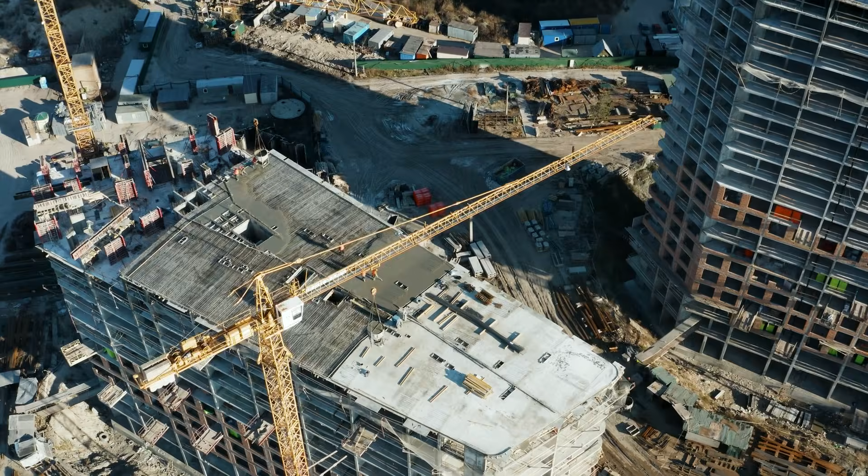Once a quiet riverside capital, Brisbane has surged into one of Australia's fastest-growing urban powerhouses, driven by rapid population growth, accelerating development, and a skyline rising higher every year.

But beneath this momentum lies a problem so severe that planners have quietly warned it could throttle the city's future. Every train line, every commuter route, every daily journey into the central business district has long depended on a single rail crossing built in the 1970s—one fragile choke point carrying an entire region.

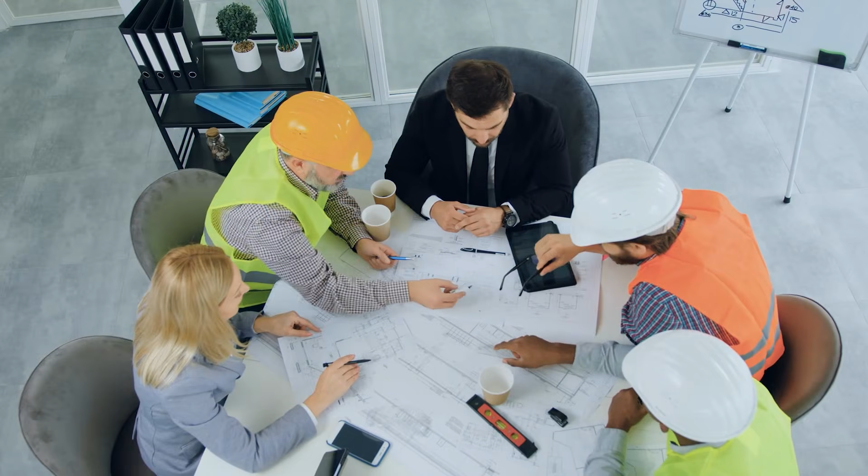For years, politicians debated it, engineers flagged it, commuters felt it, yet nothing changed. The trains got busier, the delays grew longer, and Brisbane inched closer to a breaking point. How long could a growing global city survive with a transport network that had already hit capacity?

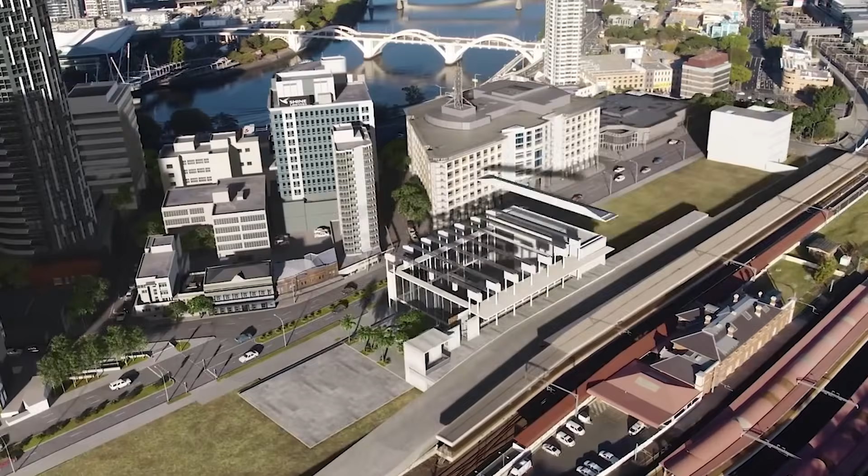Finally, the answer arrived, not with small fixes, but with the most ambitious transport project Queensland has ever attempted. Deep beneath the Brisbane River, a new rail line is being carved through the earth, complete with cavernous underground stations, cutting-edge signaling, and a massive tunnel that will redefine how the city moves. Today, let's delve into Brisbane's $13 billion cross-river rail megaproject.

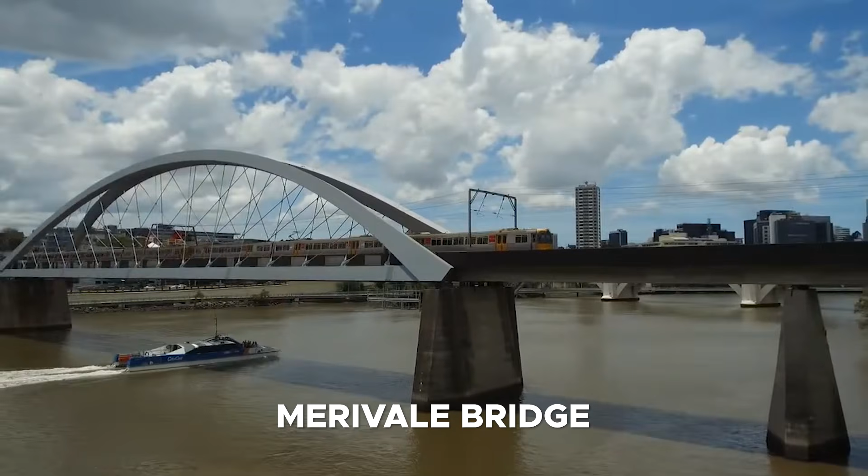Brisbane's geography has always shaped its transport problems. The Brisbane River divides the city in ways that force nearly all rail lines into a single narrow corridor as they approach the central business district. At its center sits the Merivale Bridge, the only inner-city rail crossing over the Brisbane River.

When it opened in 1978, it was hailed as visionary. No one imagined it would one day become one of the most overstretched pieces of rail infrastructure in the country. By the 2000s, booming population growth and rising train patronage pushed the network closer to breaking point.

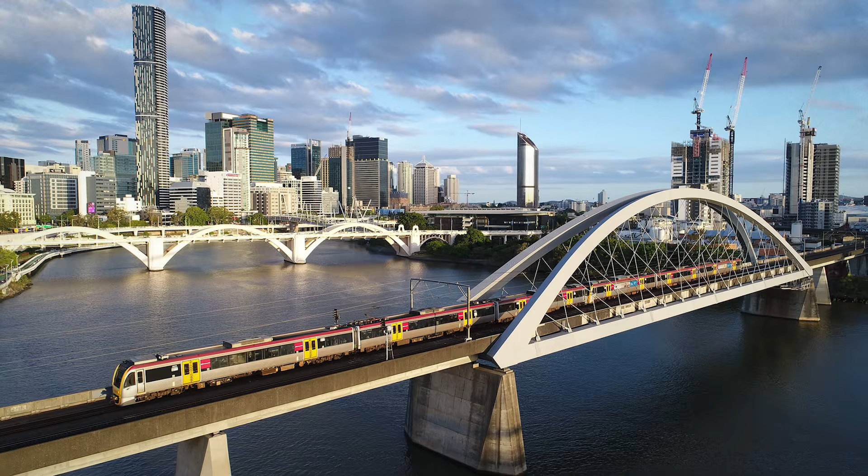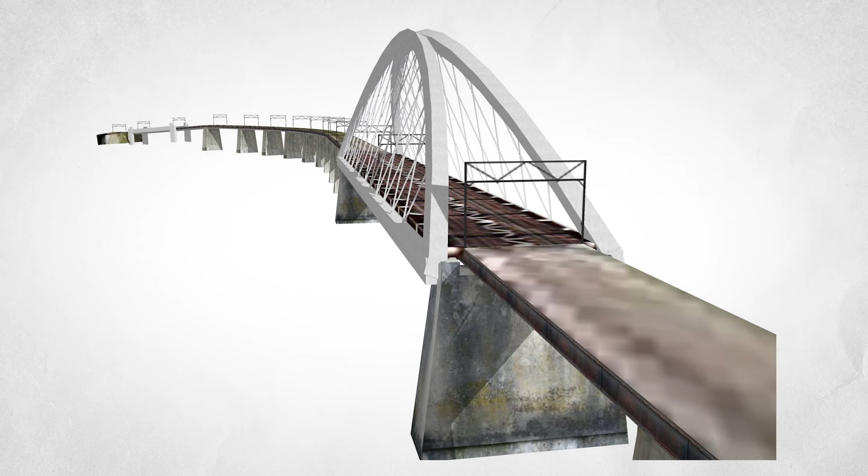Every additional service, no matter where it came from, had to squeeze across the same bridge. Peak hour trains ran at maximum capacity. Delays on one line rippled across the entire network, and modeling showed Brisbane would hit an unbreakable ceiling by the mid-2020s, unless a second river crossing was built.

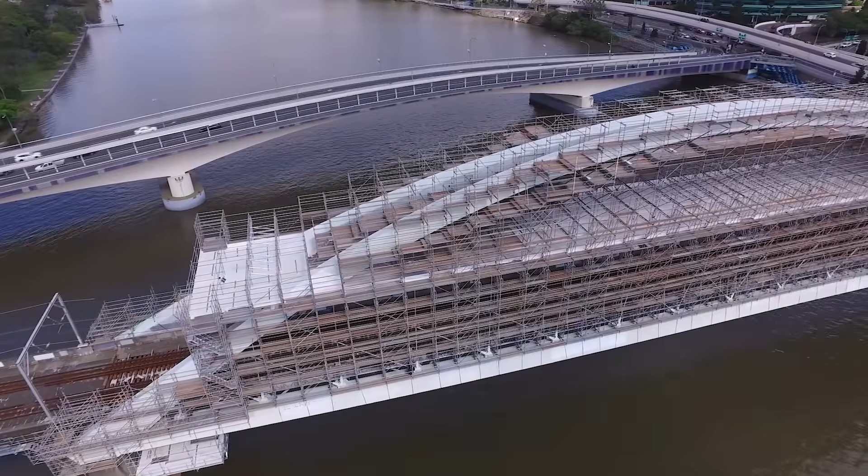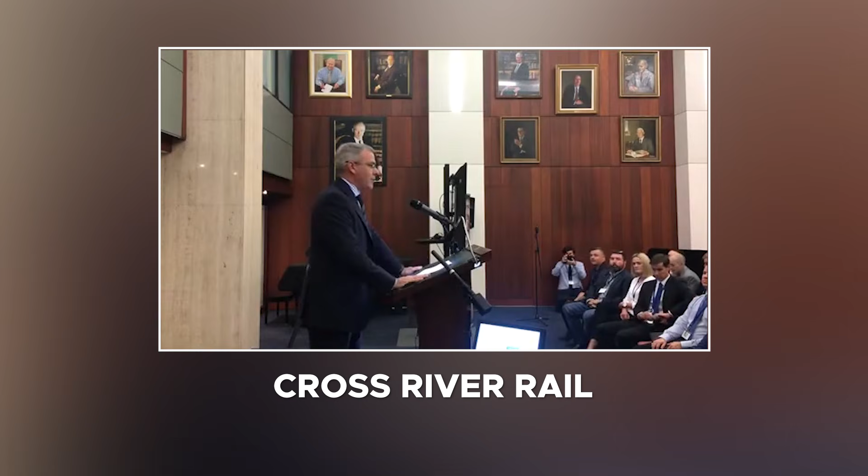Governments attempted solutions, including the ambitious underground bus and train project, but political shifts and escalating costs saw proposals repeatedly scrapped and revived. Through every review, one conclusion remained constant: Brisbane desperately needed another inner-city rail link. With the business district densifying and the 2032 Olympics approaching, the Queensland government finally approved Cross River Rail in 2017, ending decades of debate and beginning a new era in transport planning.

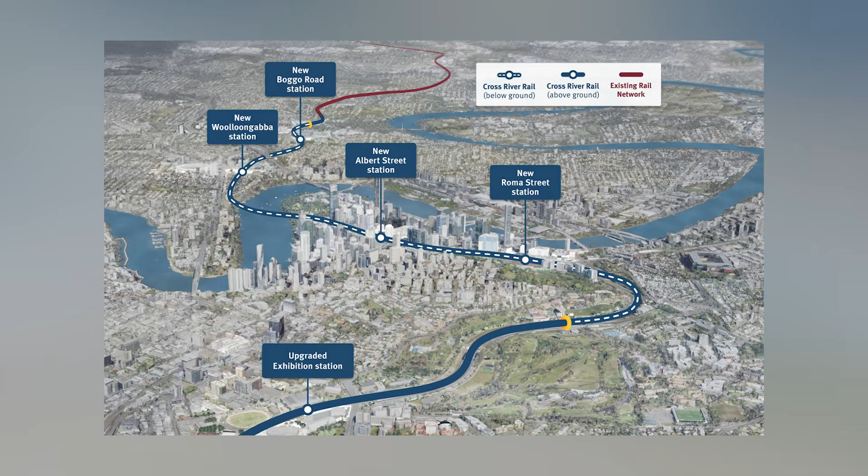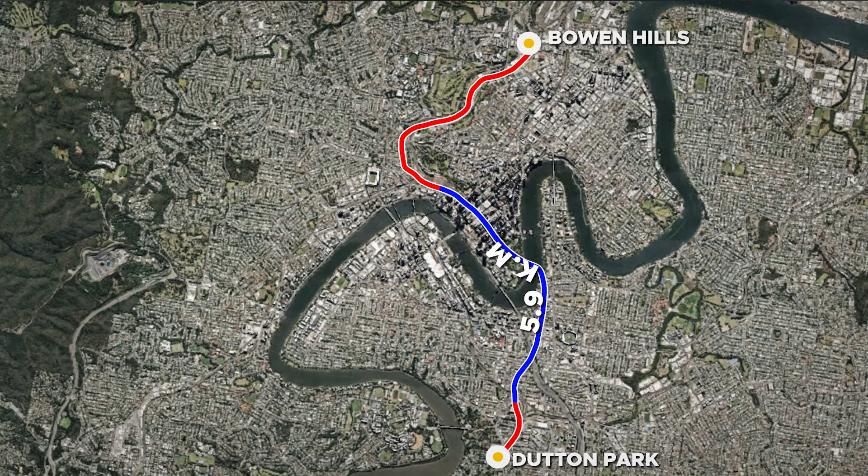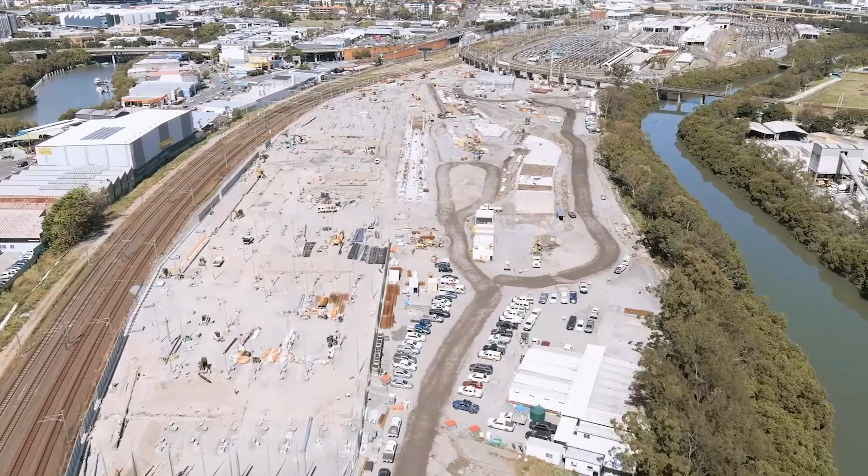Cross River Rail represents a complete rethinking of how rail will function in Brisbane for decades to come. Stretching 10.2 kilometers from Dutton Park to Bowen Hills, the project includes a 5.9-kilometer twin tunnel system running deep beneath the Brisbane River and Central Business District that allows trains to bypass the overloaded Merivale Bridge entirely. By diverting services from the existing network, Brisbane gains the ability to run more frequent, more reliable services across the entire system.

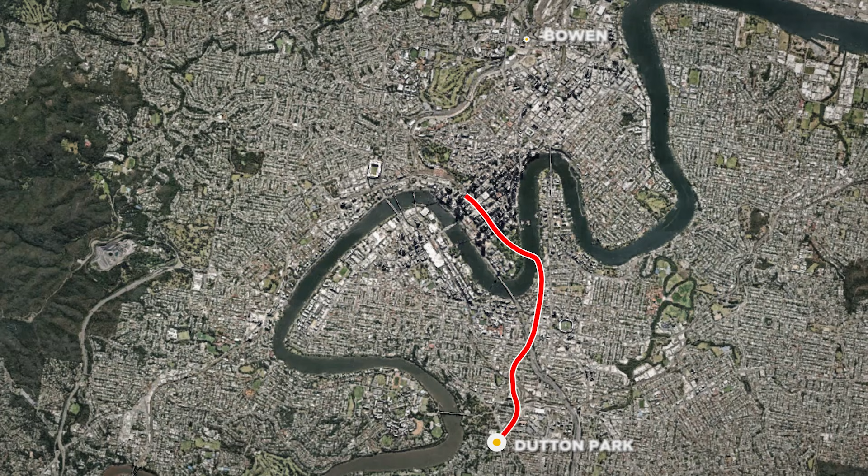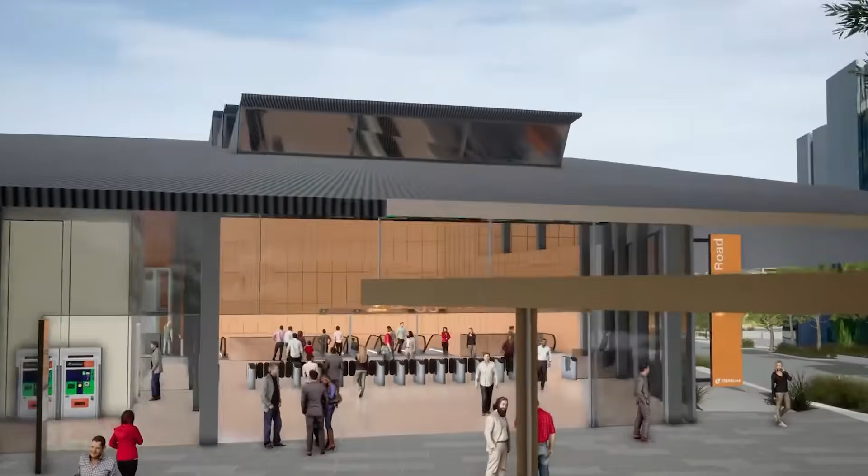At the center of the project are 4 new underground stations, each designed to reshape the precinct around it. Boggo Road Station will form a major interchange linking rail, busway, and the nearby Health and Science Precinct, serving thousands of students and researchers. Woolloongabba Station has been built as a key events interchange, directly connected to the Gabba Stadium Precinct and future Olympic facilities.

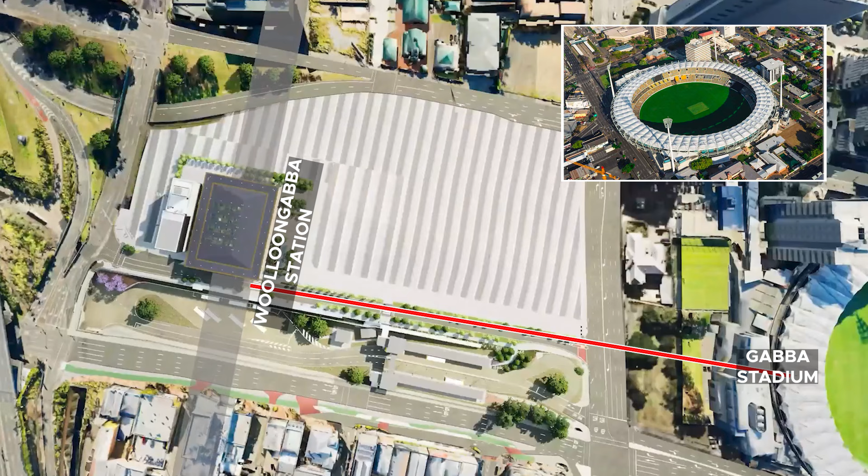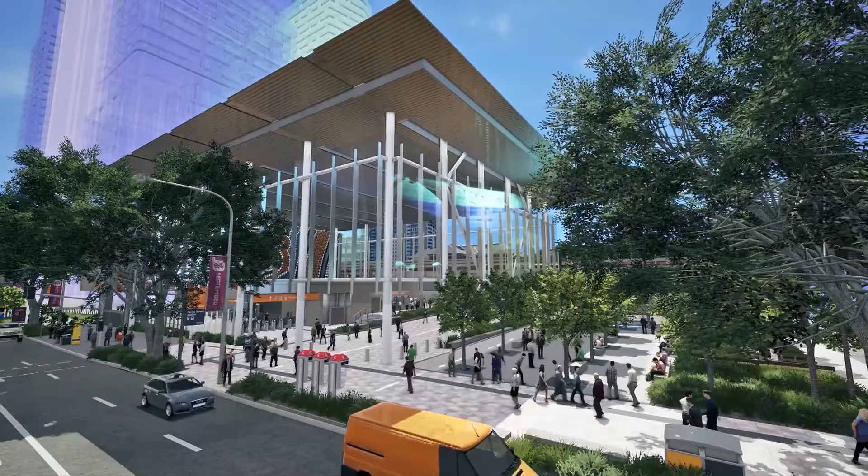Albert Street Station marks a historic milestone as the first train station ever constructed inside Brisbane's Central Business District, unlocking new commuter flows and supporting high-rise development. Roma Street Station, already a major interchange, is being transformed into a modern transport super hub, connecting suburban rail, long-distance services, buses, and future metro lines.

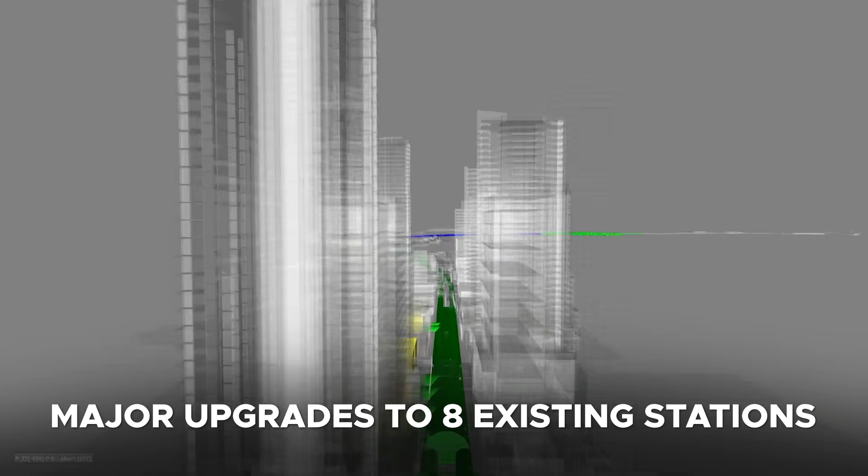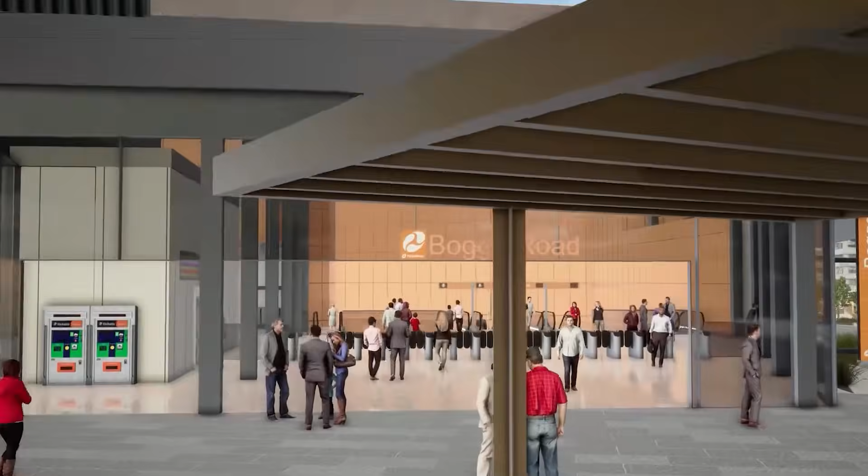These new stations are complemented by major upgrades to 8 existing stations, along with the introduction of the European Train Control System, a modern signaling technology that enables trains to run closer together safely. Architecturally, the stations feature deep caverns, long escalators, large concourses, platform screen doors, and advanced ventilation and safety systems designed to meet global standards.

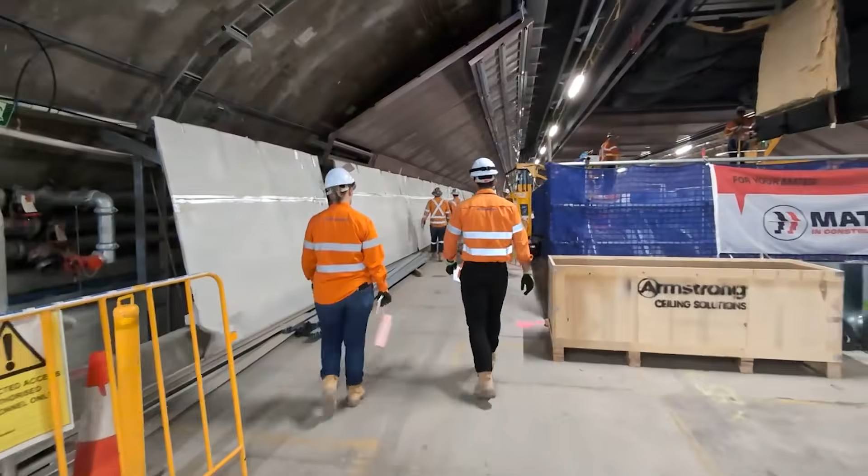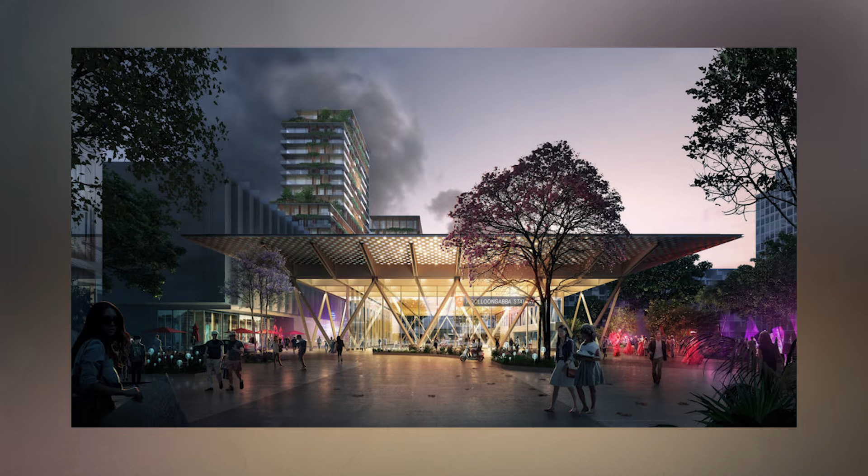The project also enables significant overstation development, allowing dense mixed-use precincts to rise above new transport hubs. At Albert Street and Woolloongabba, planners foresee commercial towers, residences, and retail spaces built over the stations, reshaping the skyline and greatly boosting the long-term economic impact of Cross River Rail.

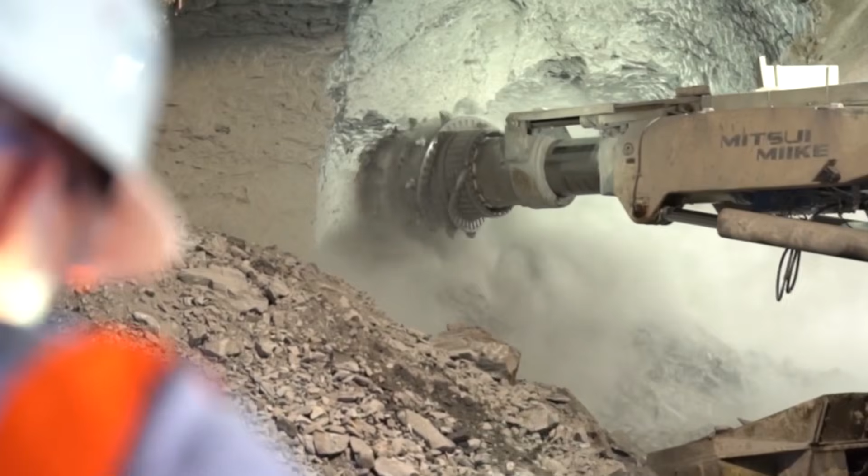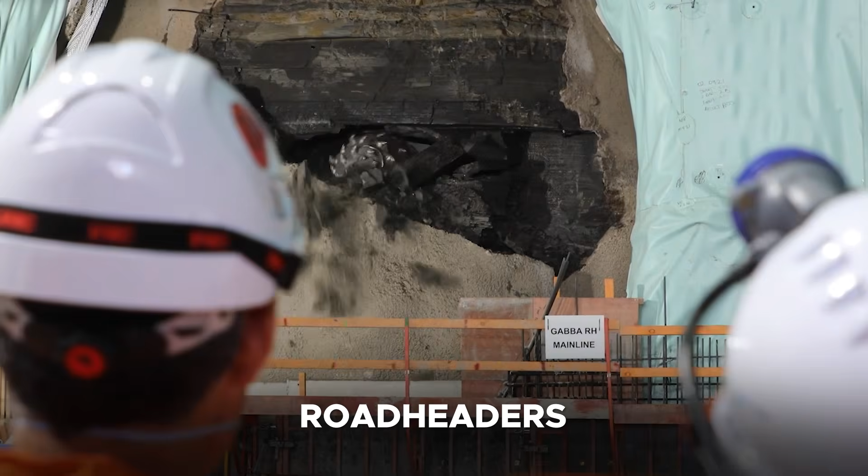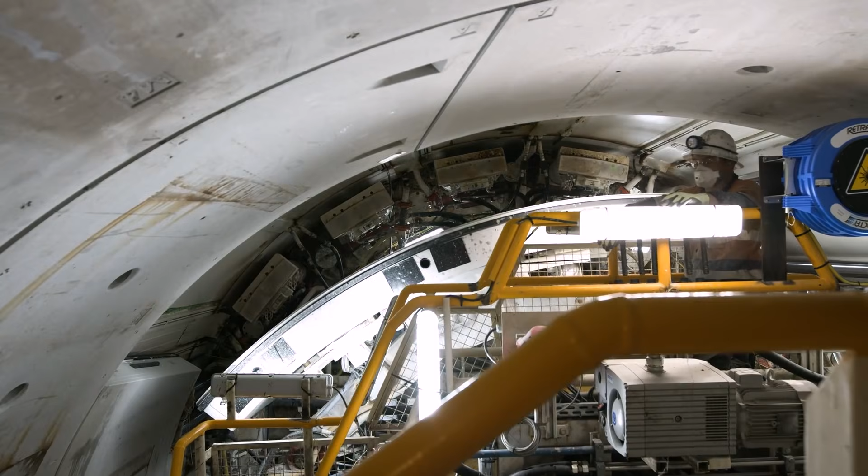Delivering Cross River Rail has required some of the most complex engineering Queensland has ever undertaken. Unlike other Australian projects that rely solely on tunnel boring machines, this one used a combination of tunnel boring machines and roadheaders. Two tunnel boring machines were launched from Woolloongabba to excavate the main tunnels beneath the Brisbane River and Central Business District, cutting through rock while installing concrete lining as they advanced. Alongside them, roadheaders were used where more precision was needed, particularly around curves, cross passages, and the cavern-sized underground stations.

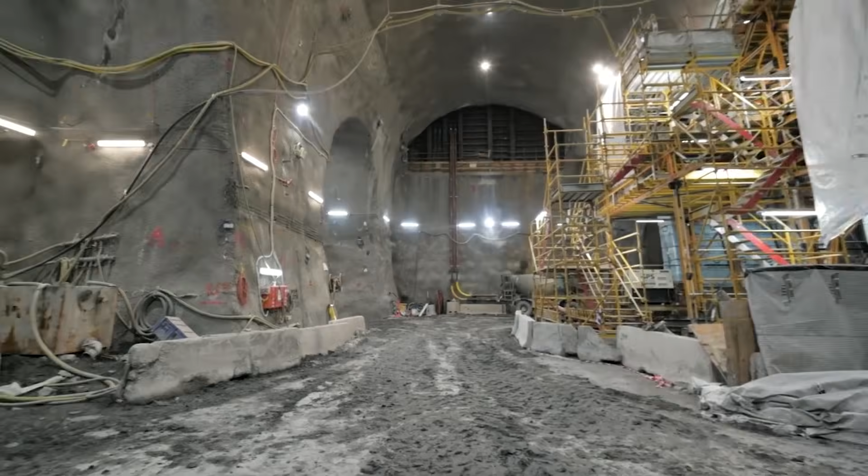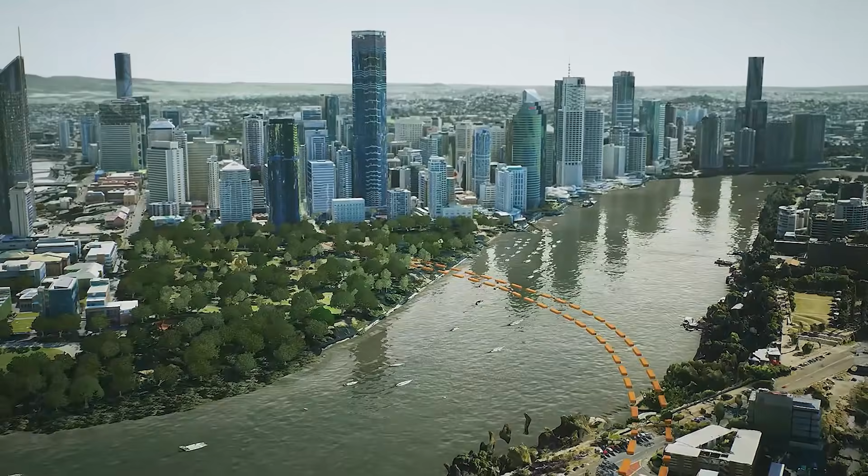Tunneling beneath the Brisbane River was one of the most challenging stages. Engineers had to manage the interface between hard volcanic rock and softer alluvial materials, ensuring the tunnel lining remained watertight. To achieve this, workers installed thousands of concrete segments, waterproof membranes, and grout injections to stabilize the surrounding earth.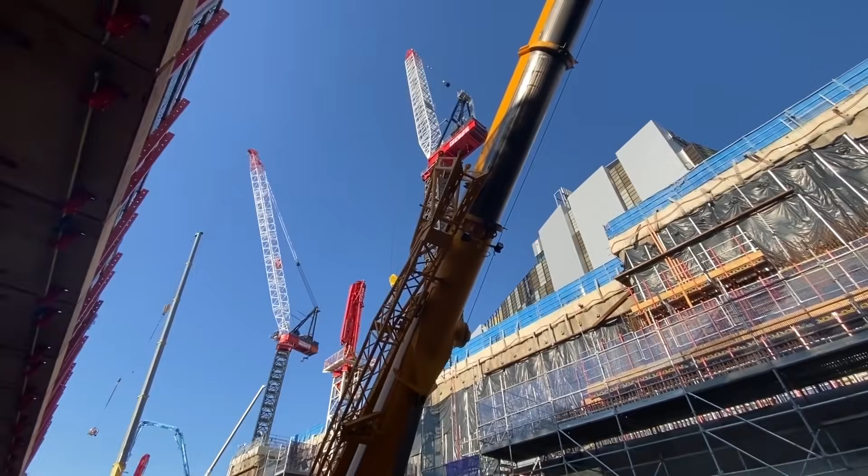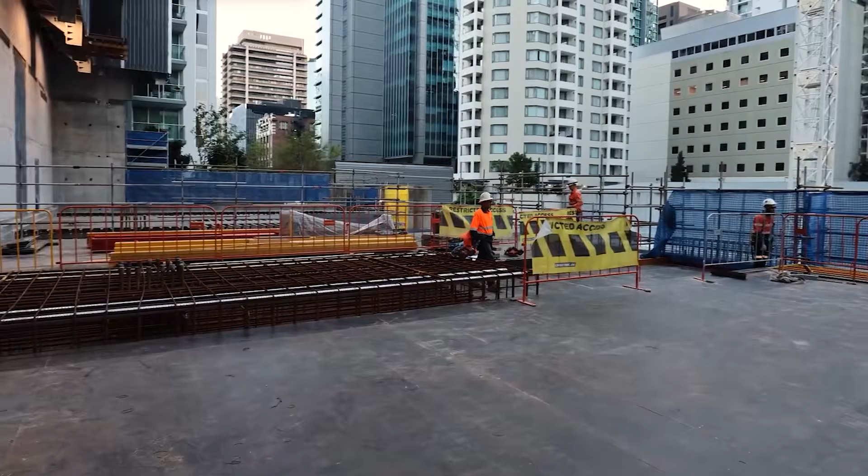Station construction required vast excavations, known as station caverns, carved out beneath the business district. At Albert Street, crews worked in confined urban spaces surrounded by high-rise buildings and busy intersections, lowering heavy machinery into a narrow footprint while maintaining safety and minimal surface disruption.

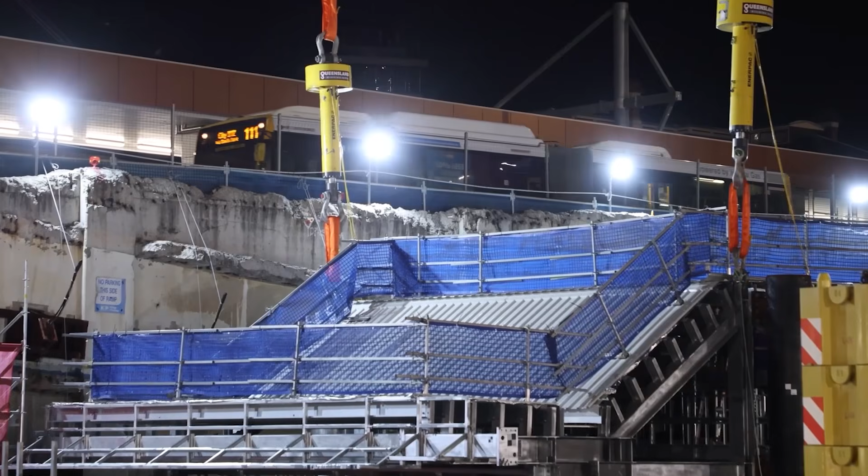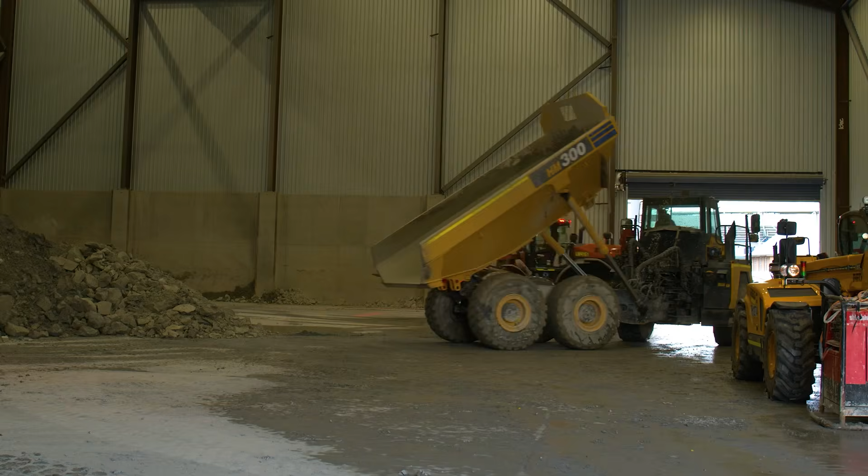Roma Street's redevelopment involved demolishing aging structures while keeping critical transport services running, creating complex staging challenges. Spoil removal became a 24/7 logistics effort, with millions of tons of excavated material hauled off-site as the workforce swelled into the thousands of people at peak activity. Engineers carefully sequenced tunneling, cavern excavation, track laying, and systems installation to avoid conflicts and delays.

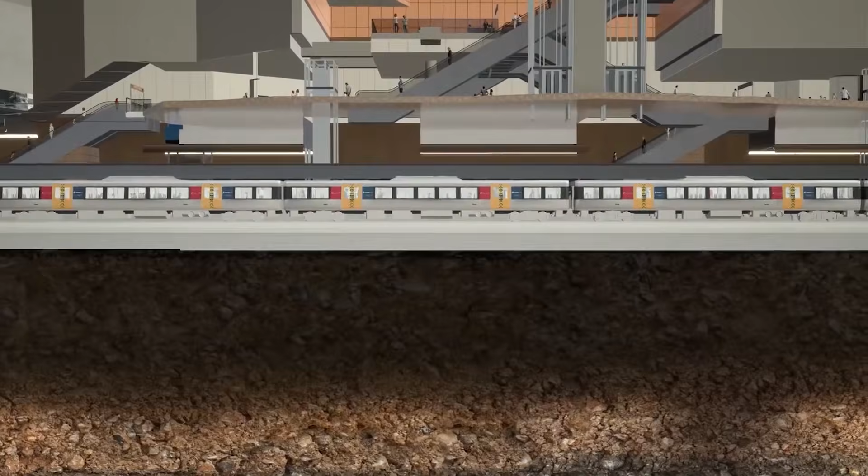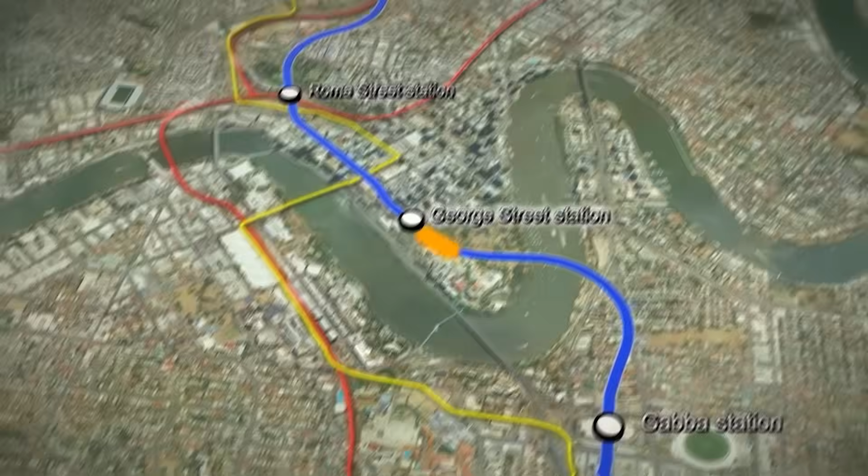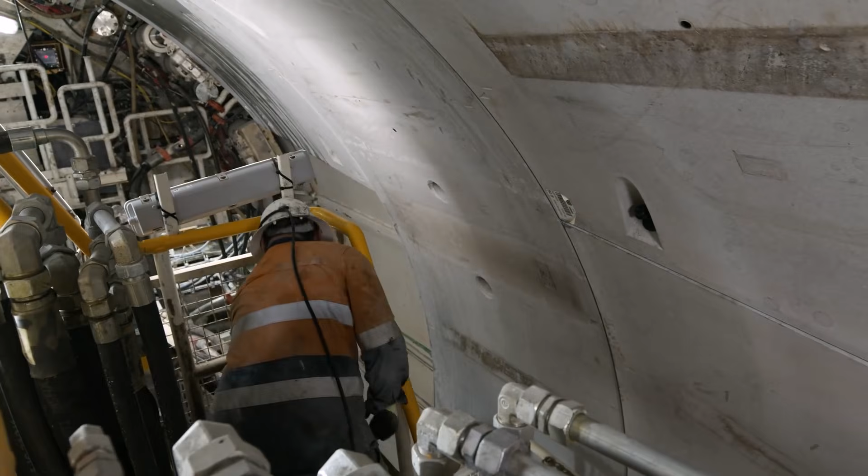Across the network, tunnels were reinforced with steel and concrete designed to withstand heavy rail loads and Brisbane's flood-prone environment, while new ventilation shafts, emergency exits, and electrical substations were built to ensure safe operation. Ultimately, Cross River Rail marks a major leap in Queensland's engineering capabilities, introducing modern tunneling methods, attracting global expertise, and training a new generation of skilled workers who will shape the state's future infrastructure projects.

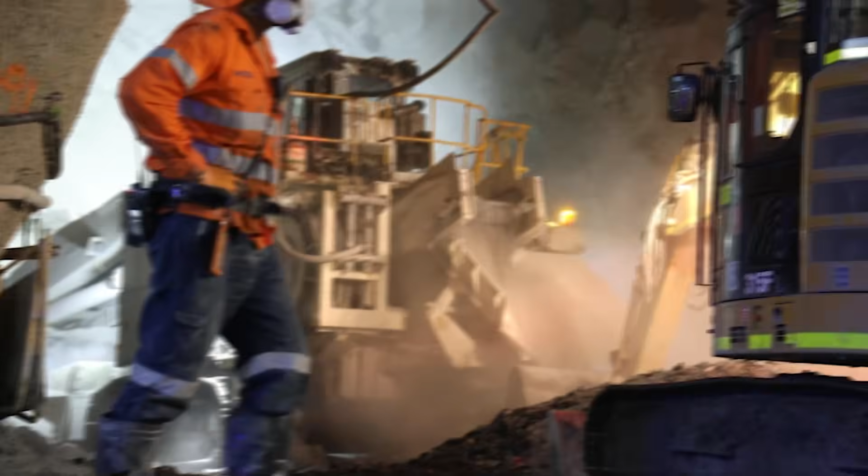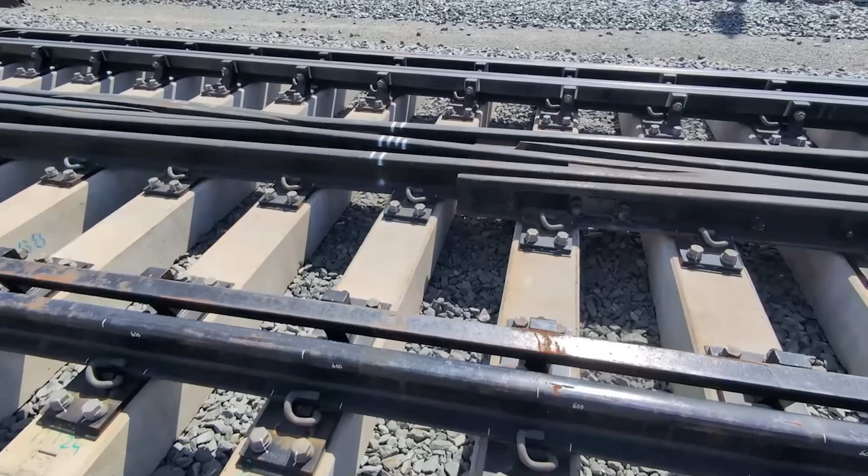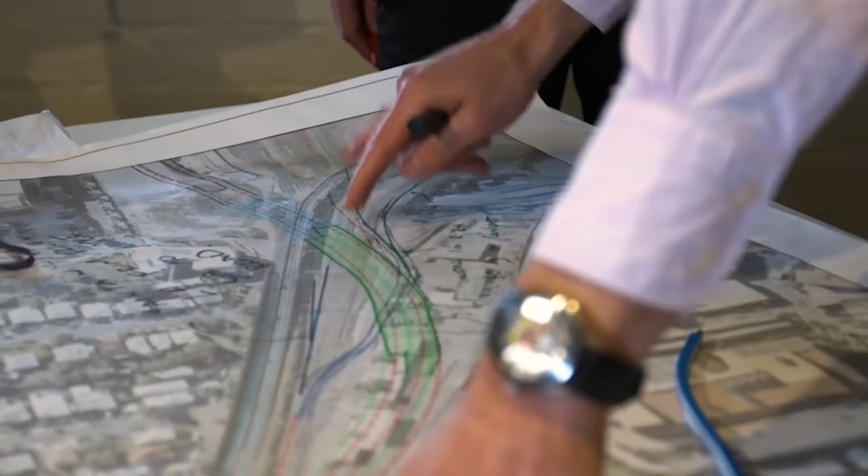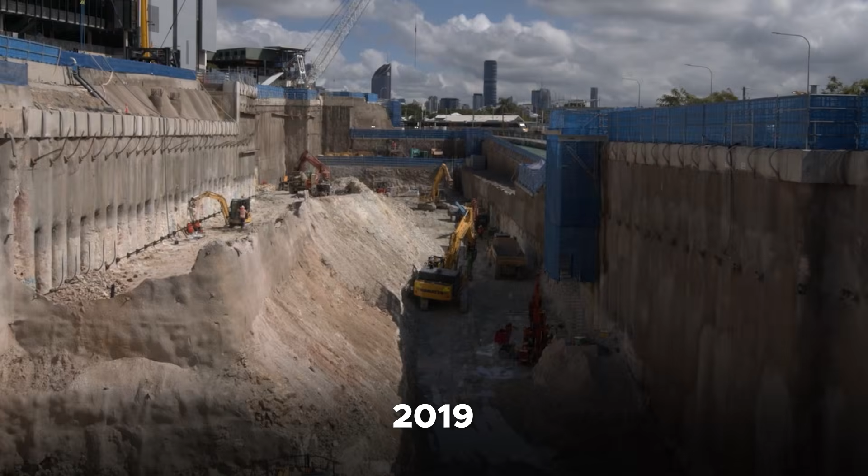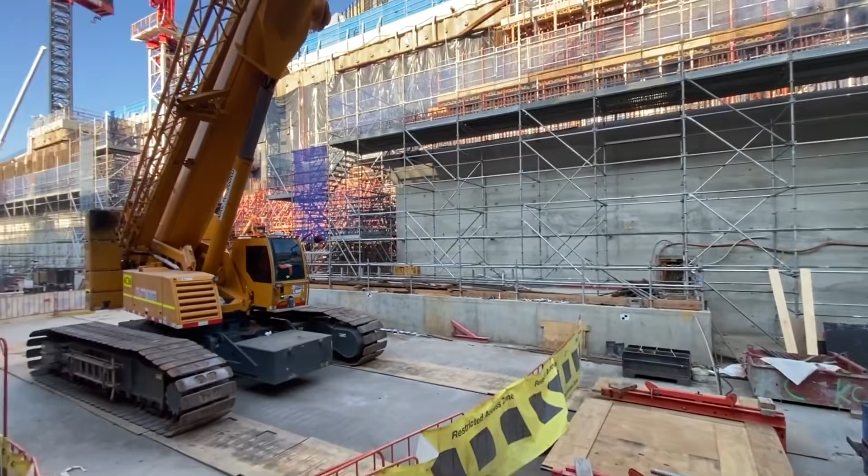After unsuccessful attempts to secure federal funding, the Queensland government became the primary backer. The project was split into major procurement packages, allowing specialist contractors to deliver individual components while maintaining integration across the entire network. Construction began in 2019, with major tunneling completed in 2021, and station excavation finished by 2023. As of 2025, the project is in its final delivery phase, with fit-outs, track installation, signaling integration, and systems testing continuing over the coming years.

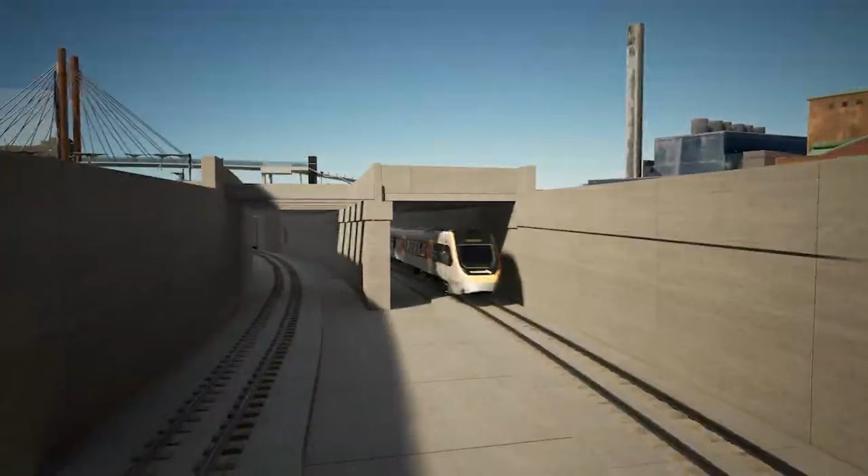Cross River Rail is on track to open later this decade, supporting Brisbane's wider transport upgrades ahead of the 2032 Olympics.

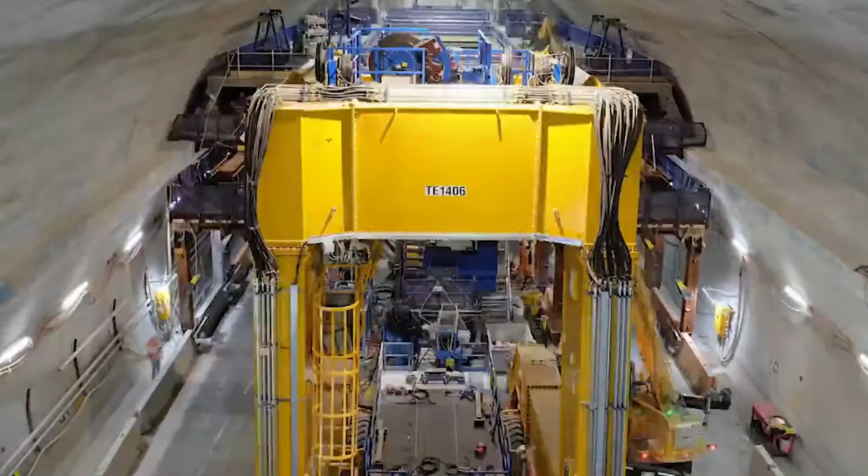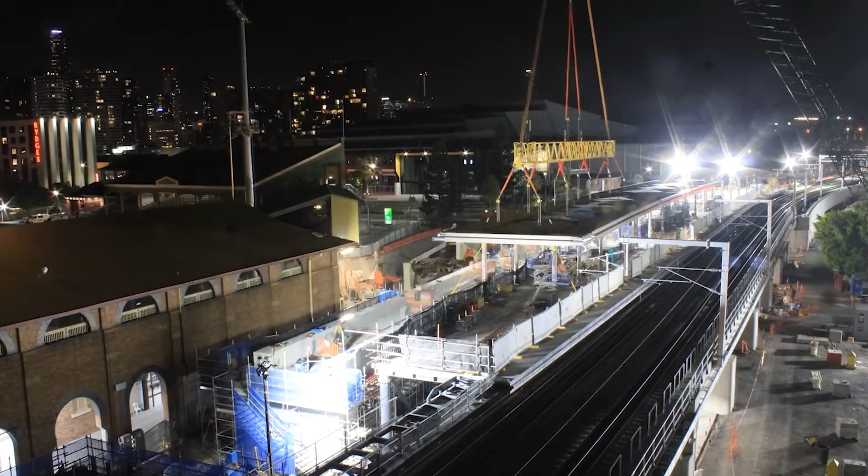As with any megaproject of this scale, Cross River Rail has faced intense scrutiny. Political disagreements have followed it from the beginning, with changing governments altering, delaying, or canceling earlier versions. Concerns about transparency, procurement decisions, and the escalation of costs to roughly 20 billion Australian dollars have fueled debate over financial management and whether the project might have been cheaper had action been taken sooner.

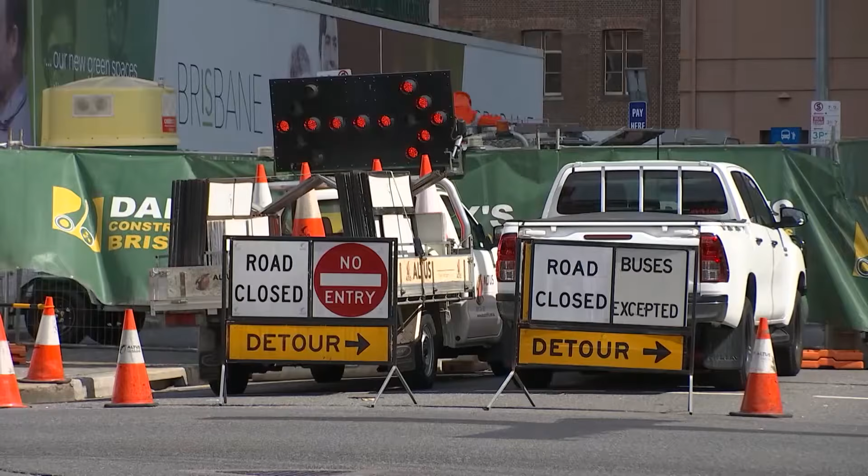Construction impacts have also frustrated residents and businesses around Woolloongabba, Albert Street, and Roma Street, who have endured years of noise, road closures, and repeated disruptions. Questions remain about whether the project will be ready in time to support the 2032 Olympics, particularly with Woolloongabba Station playing a central role in the stadium precinct.

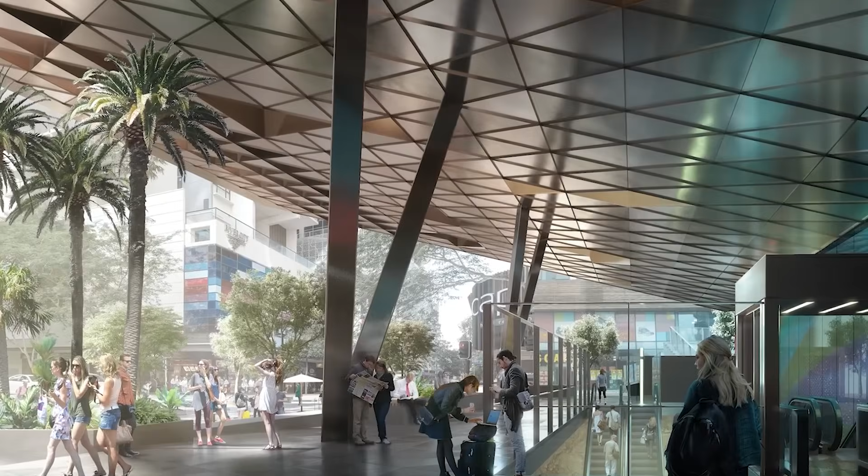Others argue that more investment in rail lines, fleet expansion, and suburban upgrades will still be needed to fully unlock the project's benefits. Yet, despite the criticism, most experts view Cross River Rail as essential to preventing worsening congestion and maintaining Brisbane's long-term competitiveness.

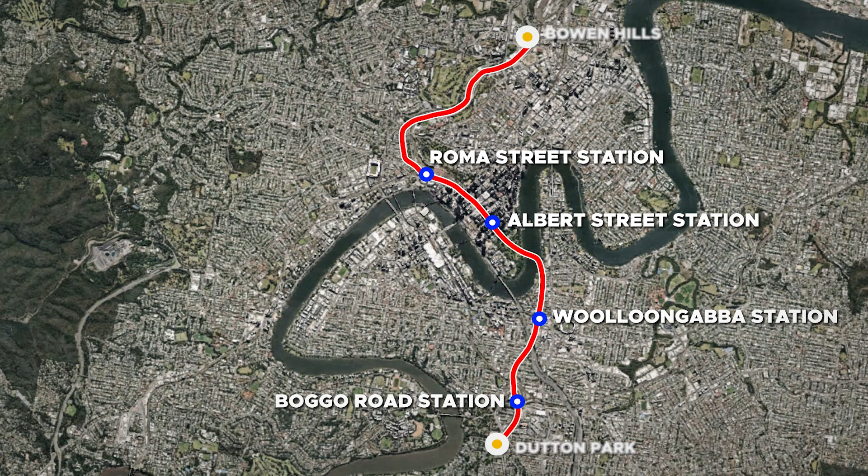Once operational, Cross River Rail will transform how Brisbane moves and grows. Its new underground spine creates a separate north-south rail corridor, allowing more frequent services, reducing crowding, and improving reliability across the network. Commuters will enjoy faster, more dependable journeys, while Brisbane's first true inner-city rail loop will better connect high-growth precincts on both sides of the river.

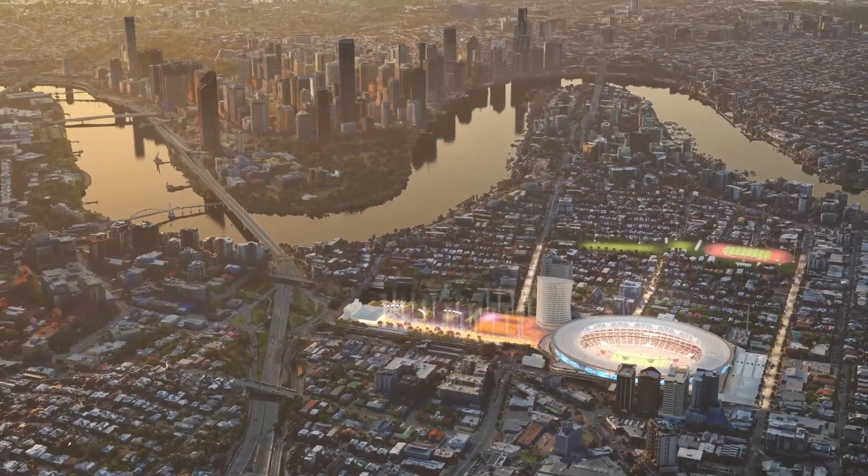Albert Street Station will ease pressure on Central and Fortitude Valley, and Woolloongabba is set to develop into a major transit-anchored precinct, especially ahead of the 2032 Olympics. Economically, the project is expected to generate billions in development around station precincts, driving transit-oriented growth and concentrating commercial and residential activity along rail corridors.

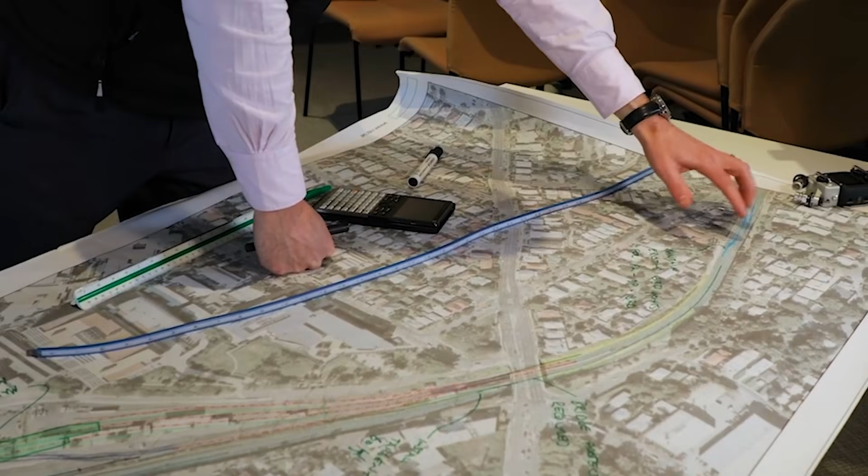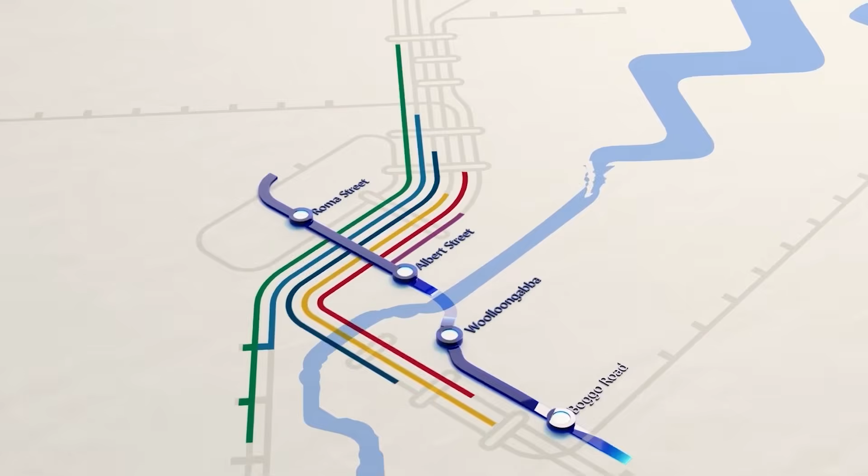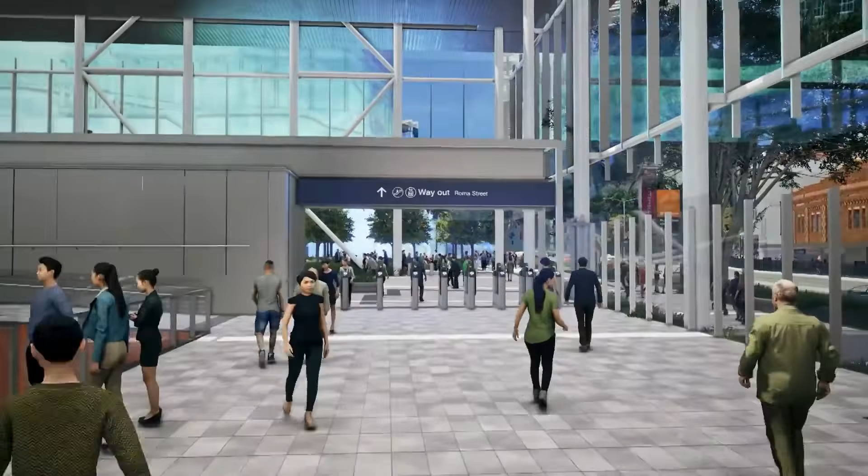Increased resilience through alternative routes and improved operational flexibility will future-proof the network against disruptions. Looking ahead, Cross River Rail positions Brisbane to function more like a modern metro system, with room for future expansion, including potential fast rail links to the Sunshine Coast and new Olympic precincts. Its integration with Brisbane Metro, upgraded busways, and enhanced pedestrian networks will create a seamless transport experience. More than a transport upgrade, it is a catalyst for long-term urban renewal and the backbone of Brisbane's future growth.